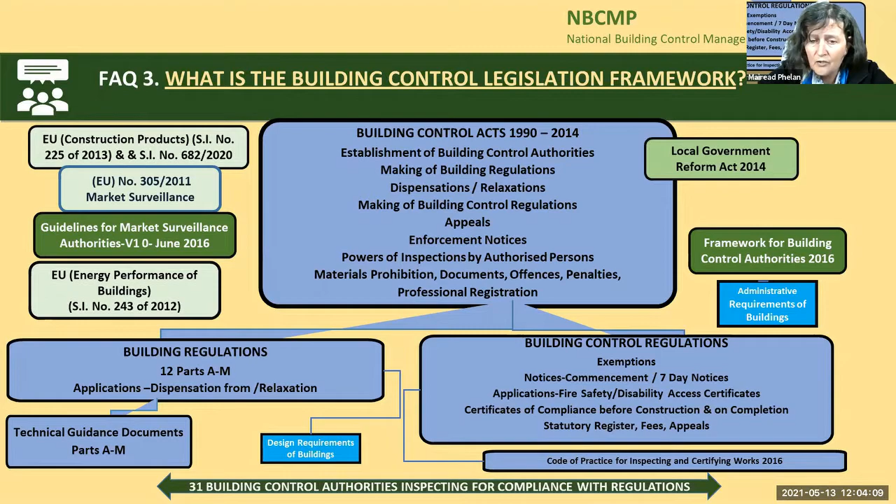We have a big army of building control inspectors on the ground in each local authority who are there to assist you in promoting compliance, promoting good building practice, and promoting health, safety and welfare of people in or about buildings, and we are there to assist them.

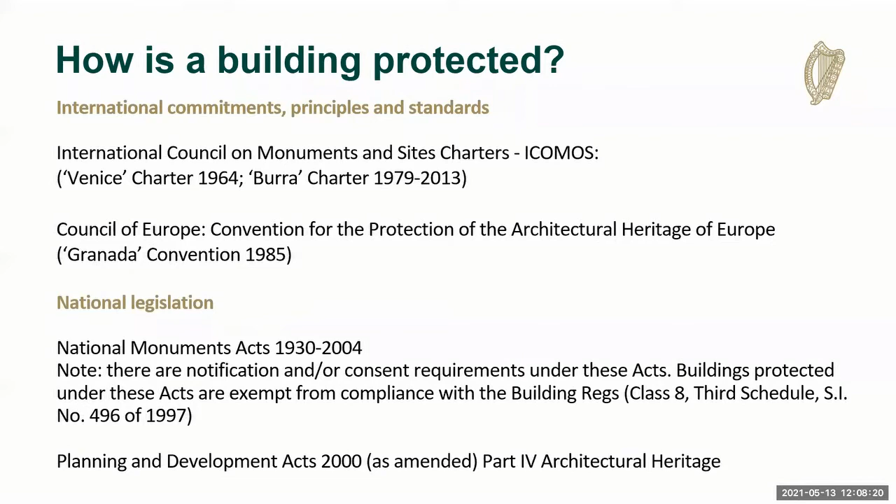Also of interest to yourselves, any buildings protected under the National Monuments Act are exempt from having to comply with building regulations. That's not to say they don't have to be safe, comfortable places to live in, but it does take them outside the loop of having to actually meet the individual requirements of the building regs.

So why are we doing all this? We are protecting our architectural heritage in the common good. They're a unique cultural resource and they are irreplaceable. People say they can build exactly the same building, but to the knowing eye, to the knowledgeable eye, these are just replicas.

Now we also need to start thinking about sustainability and climate action. We need to think about reducing both building waste and the use of building products. We need to reuse the buildings we have already and recycle them as necessary too. We also must think about cultural heritage and cultural tourism, telling people what Ireland's contribution to global heritage was. This is what these buildings represent for us all, and this is why we're trying to protect them.

I'm sure you're all familiar at this stage with the Architectural Heritage Protection Guidelines. They were a requirement under the Planning and Development Act 2000 for our minister to issue guidance to the planning authorities on how they were to protect their architectural heritage, both regarding what kind of buildings they should be trying to protect, and also how they would deal with planning or development applications for changing them.

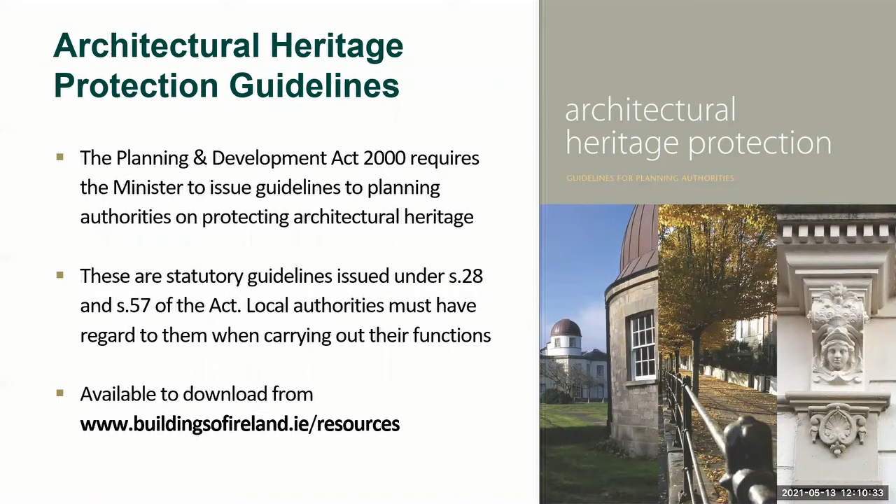Because conservation is about managing change. It's not about stopping change. It's about making sure that what is special about the buildings is kept through the process of change. These are statutory guidelines, issued under Section 28 and Section 57 of the Act, and so the local authorities must have regard to them when carrying out their functions. Unfortunately, they're no longer available in hard copy. I think we had hoped by this stage they'd have been in a second edition, but you can still download them from our buildingsofireland.ie website.

And I always think it's worth looking at what is the definition of a protected structure, because it is actually quite an all-encompassing definition. The protection can extend to the interior of the structure, the land and its curtilage, so the package of land associated with the building, any structures within that curtilage and their interiors, and then all features and fixtures which form part of the interior and exterior of any of those structures. And then even larger scale, it can be applied to any specified feature within the attendant grounds. So this would be set out in the development plan, in the record of protected structures. For example, with a country house, they might say it includes all gate lodges, domain features and the like. So the definition can be quite extensive.

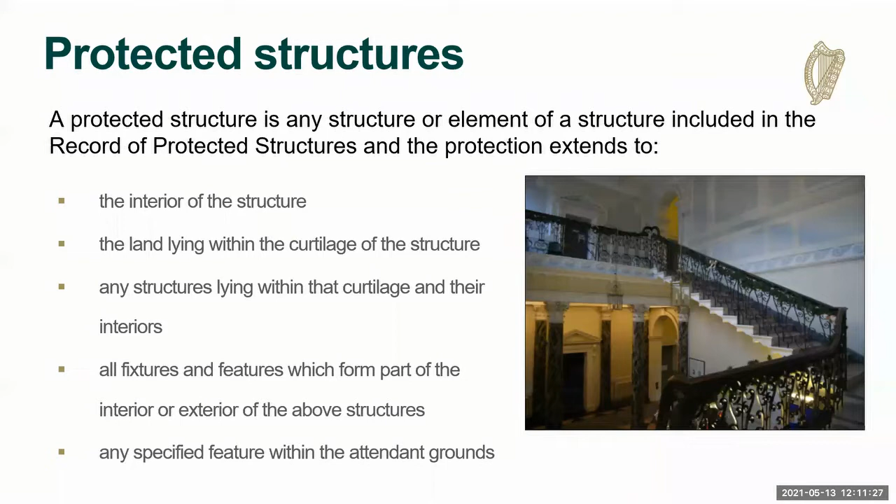Protected structures have to be of special interest according to the Planning and Development Act. So there are a number of categories set out, and I'll talk you through them to give you an idea of what makes a building special enough to be on the RPS.

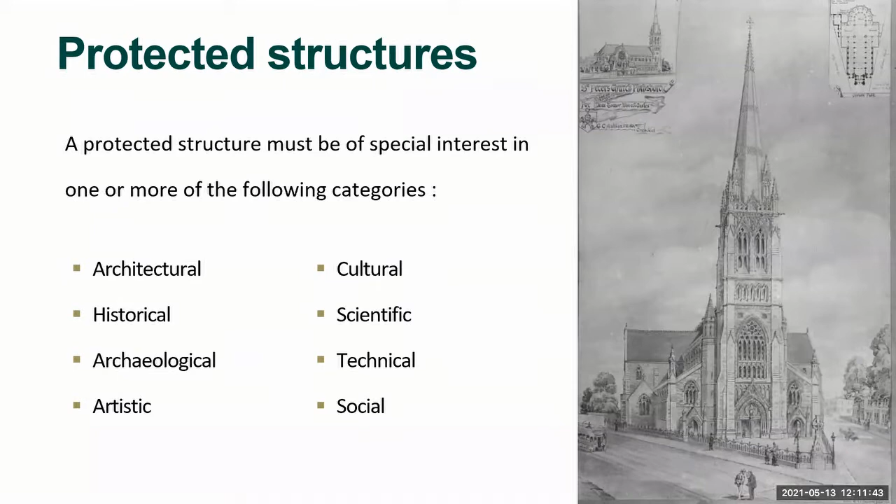It can be of architectural interest, which means it could be either a very good exemplar of a particular style or time of style or fashion of buildings at the time. It could be the work of a major architect or designer. I'm showing here Busáras because there's no limit on what date a protected structure has to be before it's protected. So modern movement buildings can and are protected structures.

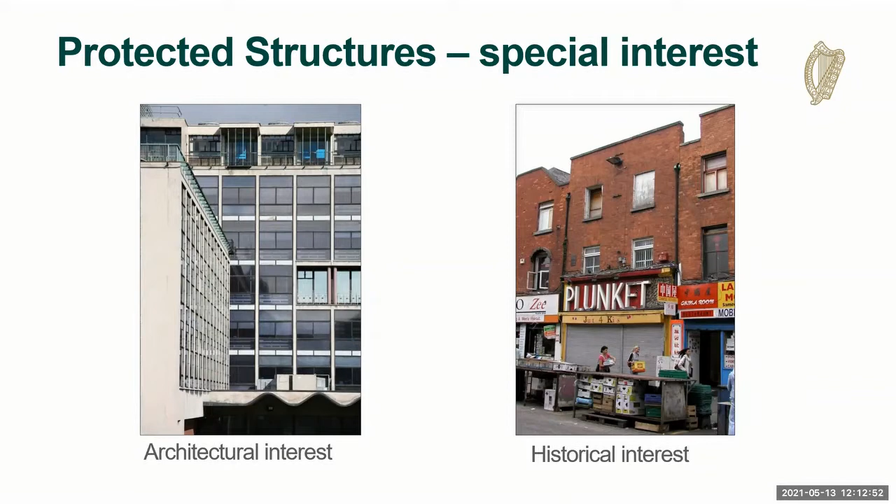A building could be of historical interest, so again it could epitomize a particular era or time. I'm showing here a protected structure on Moore Street in Dublin, which was associated with the Easter Rising. While it is an important 1760s building in its own right, so it's of architectural interest for that reason, it's particularly of historical interest because of its association with the Easter Rising and the fact that this was supposed to be where the last meeting was held of the rebels before they surrendered. So that has actually put it into a different category. It's actually now a national monument in state ownership as well because of those particular interests.

A structure could be of archaeological interest, telling what we can learn from the past from a particular building or structure. So many of these structures would also be recorded monuments. This is Thoor Ballylee in County Galway. It's of architectural interest, quite obviously. It's of archaeological interest. It's also of cultural interest because it was somewhere where W.B. Yeats lived with his family. It was also converted at a later stage by William Scott, who was a very prominent architect of the early 20th century. So you can see a structure kind of all kinds of overlaying and intermingled special interests.

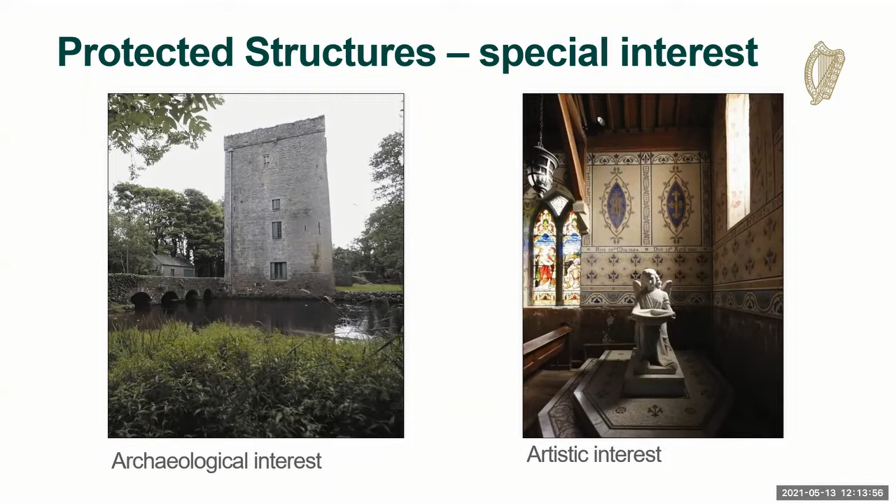Artistic interest then is generally more difficult to define, but in this case we're using an example of this church interior. As you can see, it's not just of architectural interest, but then there's also the extra interest of the mosaic work, the sculpture, the wall decorations, the stained glass, which all gives it that extra special interest.

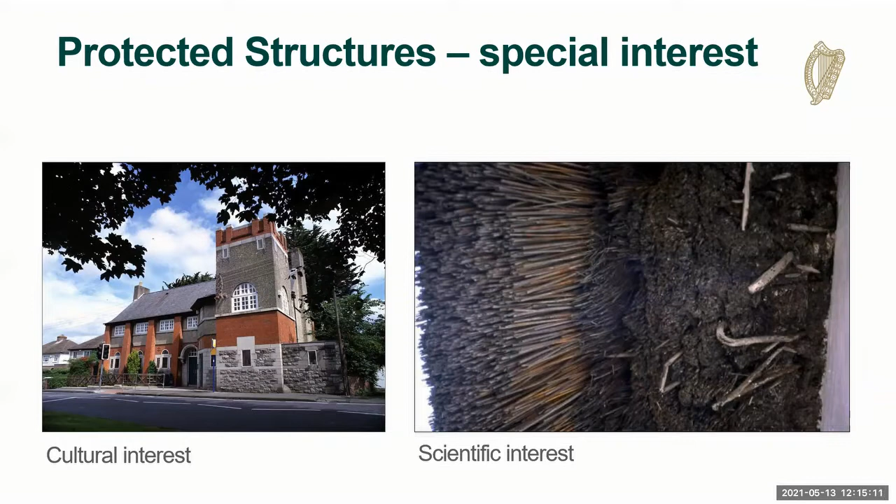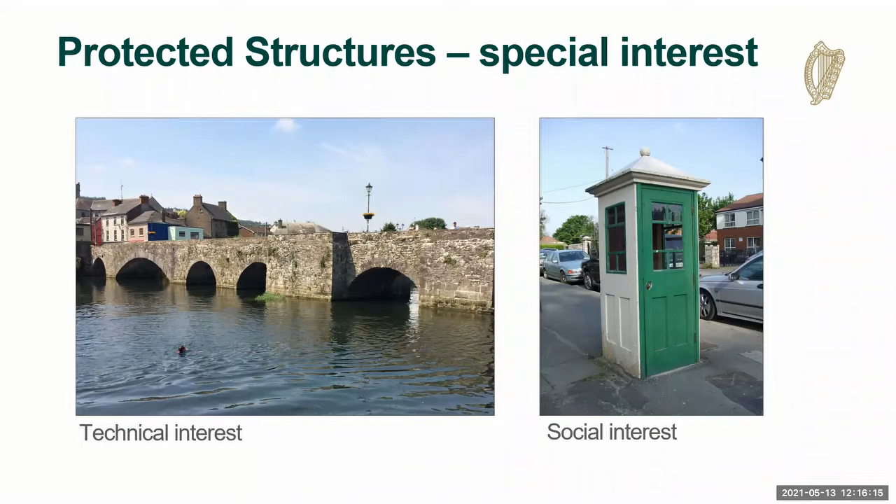So those are the categories of special interest.

A building could also be protected by being within an architectural conservation area under Section 81 of the Act. This is a way of protecting groups of structures that are distinctive or important. Maybe looking at protecting a group where the exteriors are of interest, but the interiors don't merit protection. An ACA can also be used to protect the setting of a protected structure.

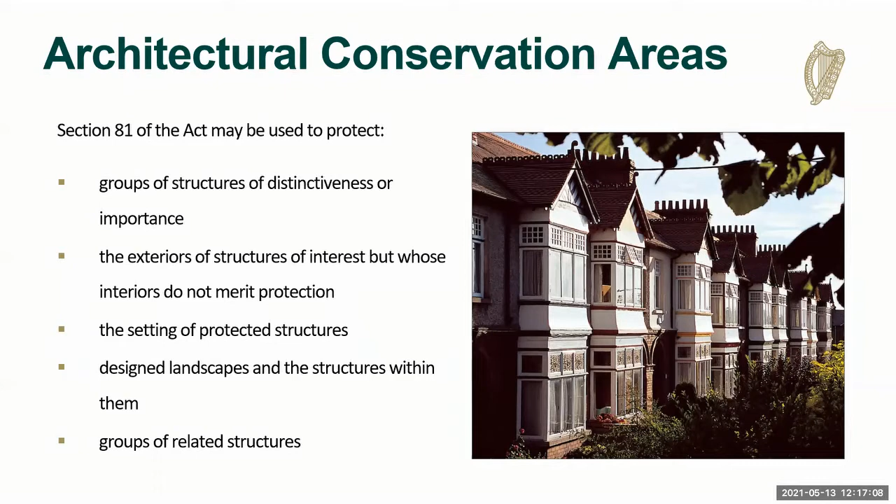It can be used to protect a designed landscape and the structures within them. So you might have an industrial heritage landscape, like a mill building, that would have a lot of other structures associated with it, like mill ponds, weirs, mill races, bridges and other structures. An ACA would be a good way of protecting them and the way they interconnect with each other. But really, an ACA can be any group of related structures.

A building can also be protected as a protected structure within an ACA. If not, if it's just protected because it's in an ACA, then works to the interior are exempt from planning permission. But there might be restrictions on the type of work an owner could carry out to the exterior of the building.

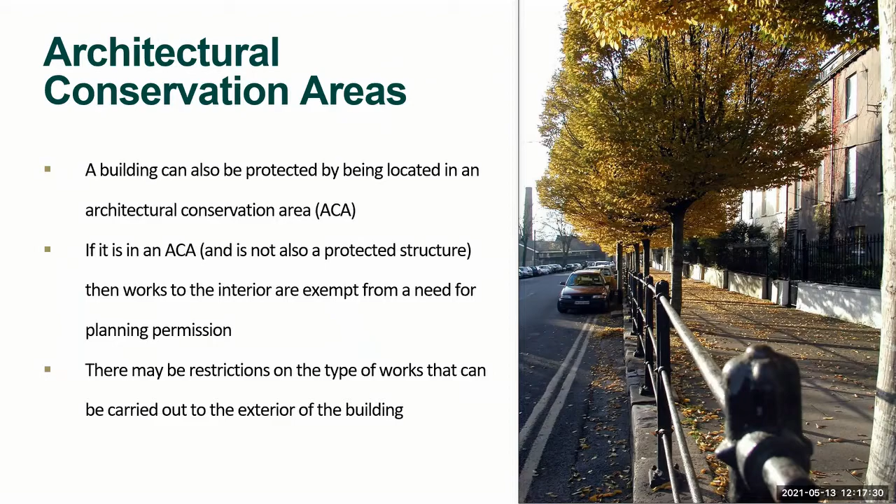So what does it all mean in practice? There are different requirements for planning applications. The test is that all works which would materially affect the character of a protected structure need planning permission. This includes works to the interior of the building, to the exterior of the building, and even where the works are to comply with building regulations or fire safety certificate work.

If it materially affects the character of the protected structure, it needs planning permission. This is why it's very important that any changes to comply with building regs or fire safety need to be included and thought about at a very early stage, so that if they have a material effect on the character of the building, it can all be included in the planning application.

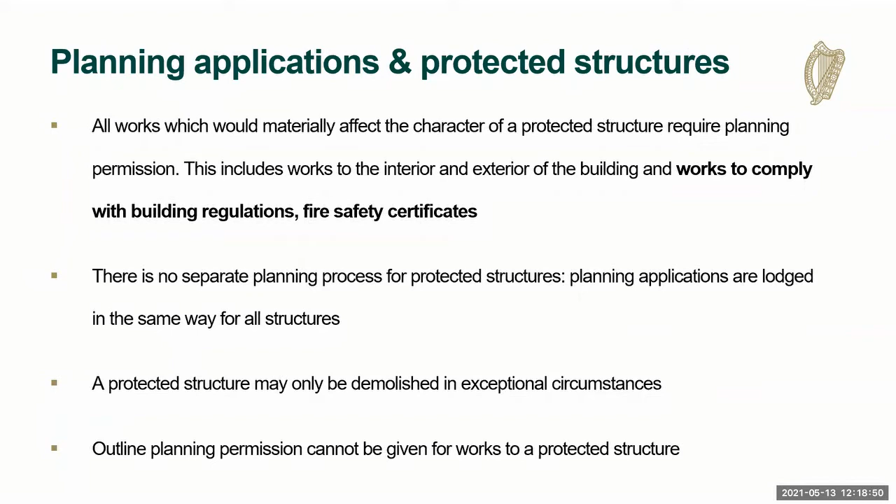There is no separate process for protected structures as there are in some other jurisdictions. All planning applications are lodged in the same way for all structures. A protected structure can only be demolished in exceptional circumstances. An owner cannot look for outline planning permission for a protected structure, again because it's in the detail as to whether the works materially affect the character of the building. So outline planning permission may not be valid if the details would affect the character of the building.

So an owner can look to the local authority for a Section 57 declaration. They don't necessarily have to have specific works in mind when they're looking for a declaration. It can just be to open a conversation with the local authority, like what is important about the building from the local authority's perspective, why have they added it to the RPS, so what works can the owner carry out or not.

Often it's recommended that if an owner is thinking of doing specific works, it might be more advisable for them to look for a Section 57 declaration to clarify what the need for planning permission is. The local authority has a statutory requirement to visit the building and issue the declaration within 12 weeks of the request. But this Section 57 declaration can't exempt any works from planning permission that would not otherwise require it. So it can really only clarify and row back on what it means for the protected structure status of the building.

So I'm just going to talk you through the conservation principles, so you get an understanding of what is special about the building and why we're trying to protect it. These conservation principles laid out in our guidelines are all underpinned by the international charters and conventions that are internationally accepted as good practice for protecting architectural heritage.

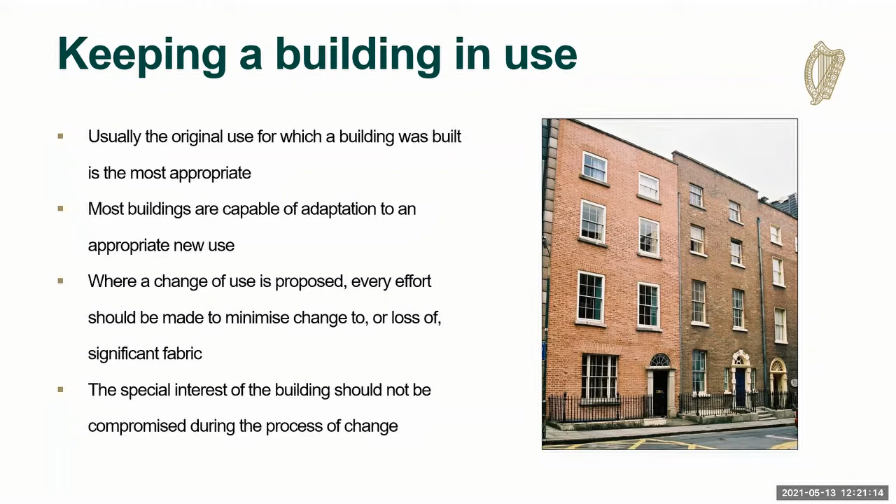But most buildings are capable of change. What is important, again, is to make sure that what is special about the building doesn't become compromised during this process of change.

We would always say that an owner, their architects and advisors need to understand the building before they start the works or before they even propose changes. They need to research the building's history, how it's changed over time, what kind of implications that has for different parts of the buildings, that they should look not at problems in isolation.

Like this damp problem here, where obviously somebody has decided to put in vents. There's obviously damp problems building up around, and the ground is softening. And really what's quite obvious here is that a rain barrel was taken away. So it's important not to go punching holes in walls, putting in vents without understanding what is causing the problem. That's just a very simple example of not understanding the building.

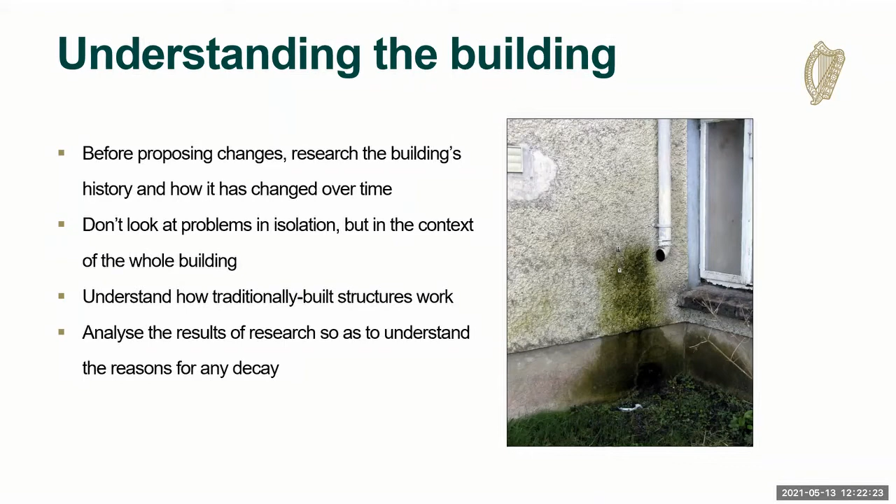Obviously, it can be more complex. To understand how traditionally built buildings work - and I'll talk a bit more about that later - these buildings were built with softer, more flexible materials, and that needs to be respected when changes are being made. You also need to analyse the results of all this research to find out what is the reason for the decay before you start proposing changes.

We would also advise owners to get the right advice, as it can be expensive and very damaging, and sometimes impossible to undo poorly carried out alterations and repairs. People should look for independent professionals, not somebody just trying to sell them an individual product or service, and make sure their advisors and contractors have the right skills for the job, that they know how to deal sympathetically with an older building, that they're not just used to dealing with modern construction, that they understand the principles of repair and conservation.

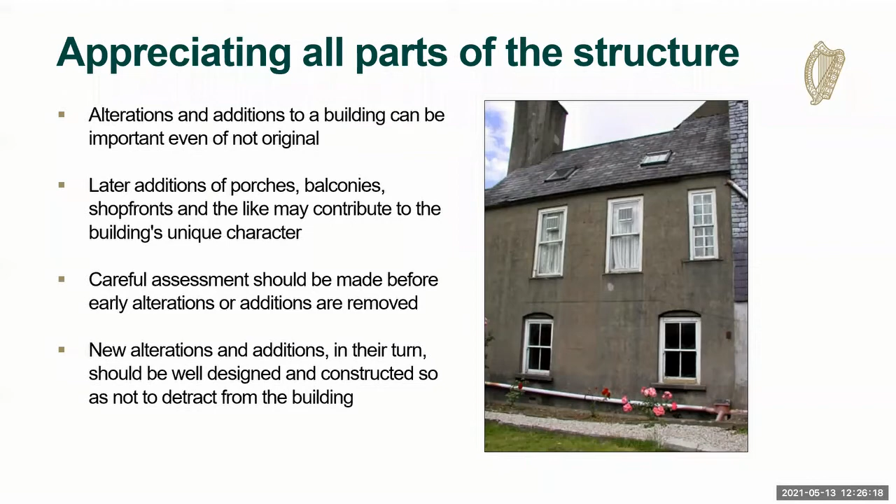Repairing rather than replacing. So conservation is about preserving the authentic fabric of the building, keeping not only the materials, but the kind of wealth of information about tooling and chiseling marks, mouth-blown and hand-cut glass and the like. And a good repair should delay the process of decay and prolong the life of the building or the element of the building without damaging its special interest.

And traditional buildings are usually capable of being repaired quite easily, as you can see here with the baluster where a new piece was spliced in. Often modern building materials, like concrete and the like, are less capable of gentle repair.

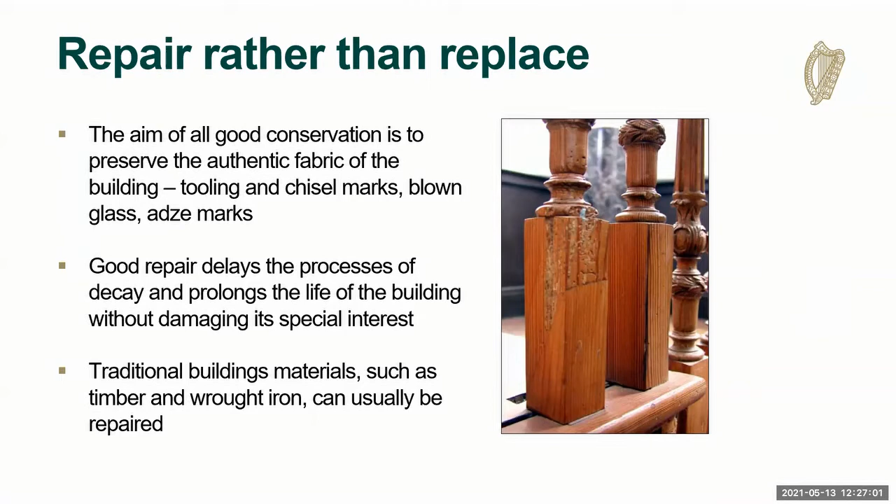Repairs can be honest, as can alterations. You know, they don't have to be artificially disguised or aged. Sometimes a good repair can leave an interesting record of the works done, but that doesn't mean they should detract from the visual integrity of the structure.

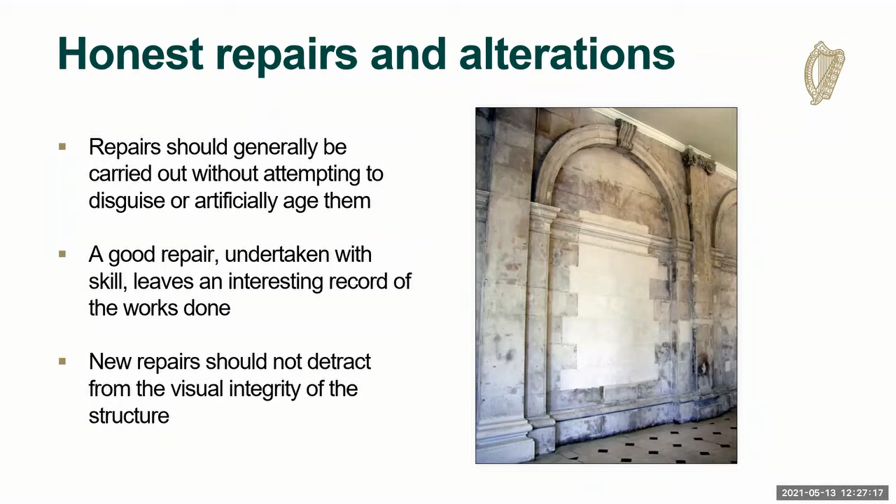You should use the right materials and methods, traditional materials and repair methods that have stood the test of time and have shown that they work. And really, modern materials and techniques should only be used where we have firm evidence that they won't cause damage.

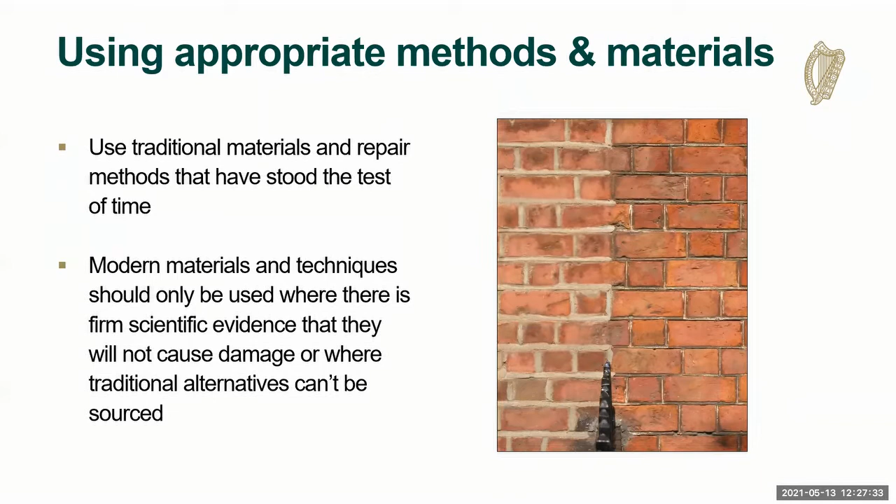Ensuring that changes can be reversed is also an important conservation principle. It isn't a justification for inappropriate interventions, but it does allow for future correction of unforeseen problems should they arise. So here you can see a later partition was taken out. They hadn't damaged the lovely Rococo centerpiece. They hadn't done any damage to the very elaborate cornice. So that was able to be reversed, taken out. It's not always possible, but it should be a principle to work on.

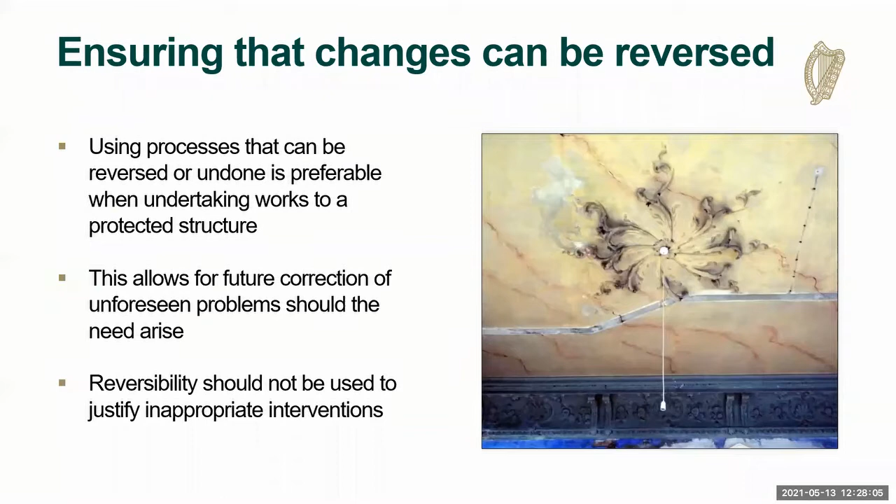And we would always advise planning authorities as well to avoid incremental change. It can be hard for them to refuse planning permission for small alterations, but you can see with the change of roof slates here to asbestos cement tiles, painting individual chimney stacks. Actually, the windows are still all the originals here, but you can just see how the architectural integrity of a group of buildings like this can fall apart with small incremental changes.

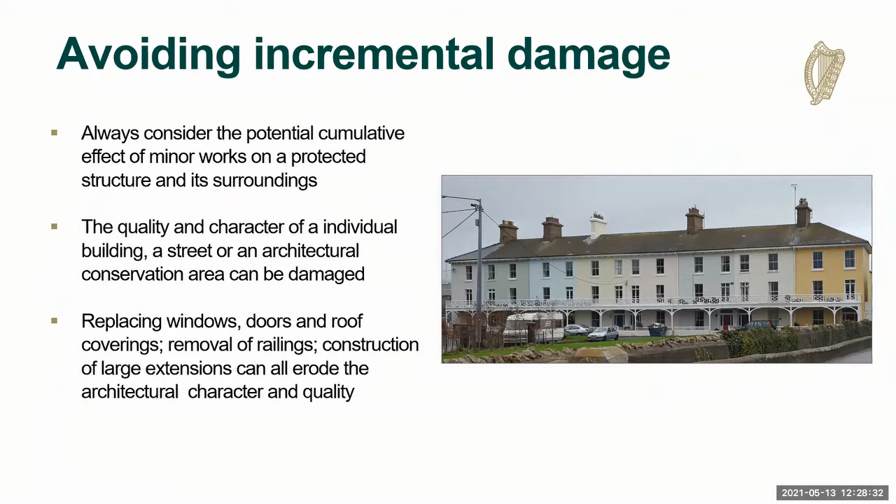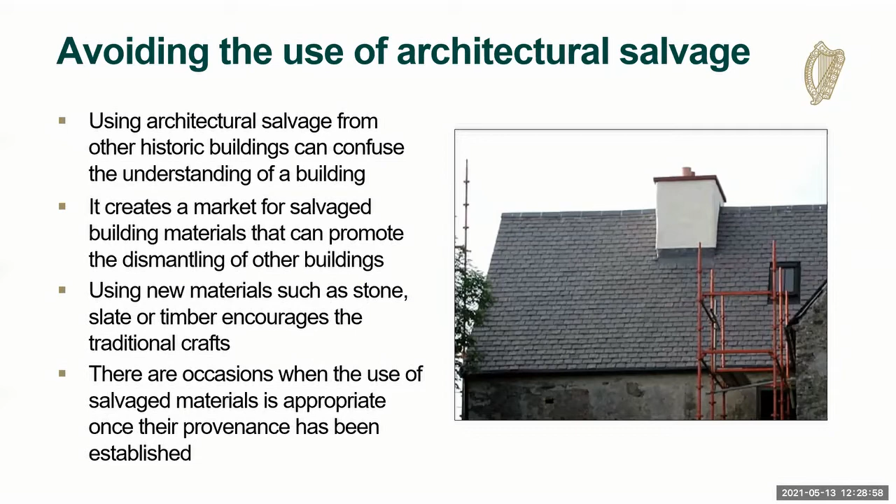We also advise the avoidance of the use of architectural salvage because it can confuse the understanding of the building. It can also create a market for theft and dismantling of other historic buildings. And using new traditional materials like stone or slate or timber does encourage traditional skills and craftsmanship. But obviously, there are occasions when it will be appropriate to use salvage materials, providing their provenance has been established.

So just to point you to some other guidance documents that we have published in the department. These were originally designed specifically for the owners of historic buildings, but they also set out what the department feels can be considered good practice and direct advisors, contractors, as to what they should be doing when they're dealing with older buildings and what is considered good practice. It's a series of 12 booklets. The latest was published just at the end of last year on disaster risk management.

Just talk briefly about access and a bit more detail about the energy efficiency because they're probably the most appropriate to yourselves. Access we published, it was written primarily by Gráinne Shaffrey of Shaffrey Associates Architects and Fionnuala Rogerson Architects. So this was a joint publication we did with the National Disability Authority, and it was giving advice on improving the accessibility of historic buildings and places. So I'd advise you have a look at it if you're involved in that.

I'll talk a little bit more about energy efficiency because this is a topic that is going to be very much to the fore in the next number of years. We published this guidance back in 2010. The principal authors were Paul Arnold Architect and the Energy Research Group in UCD. And again, it set out the principles of upgrading energy efficiency for older buildings. And what we call them traditionally built buildings because it was more about the way they were built with solid masonry walls rather than necessarily just their architectural heritage interest.

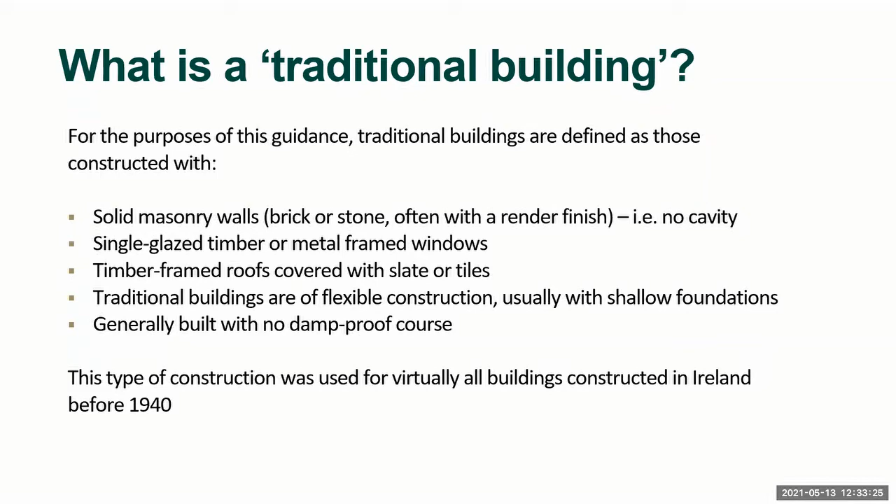So just what is a traditional building? So for the purposes of this guidance, we've defined them as buildings built with solid masonry walls, so no cavities, often brick or stone, sometimes with a render finish. They usually were originally built with single glazed timber or metal framed windows, timber framed roofs with slate or tile covering. As I say, they were generally of flexible, soft construction using lime mortars, usually with shallow foundations. So they were built to flex and move with and respond to environmental conditions. They were generally built with no damp-proof courses. And it was the type of construction that was used for almost all buildings constructed in Ireland before 1940. So it's a large percentage of the building stock.

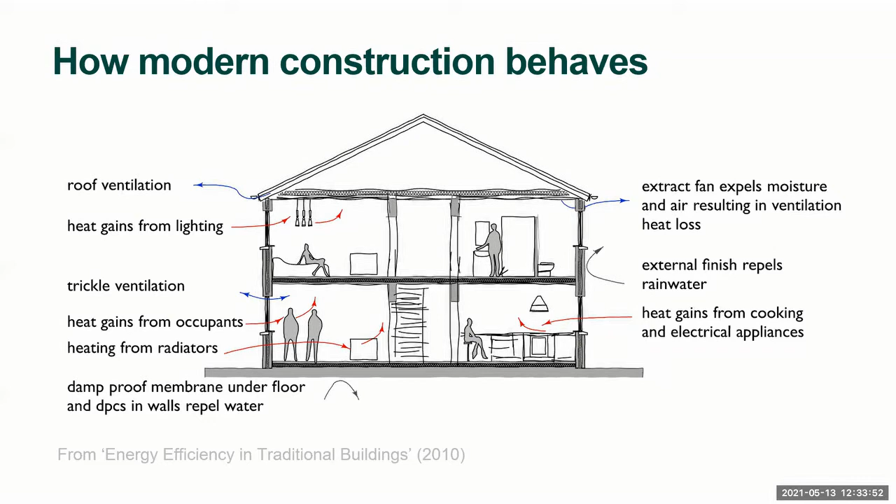So we included in our 2010 guidance just how modern construction behaves. So it's all about stopping water getting into the fabric of the building, and then having to provide ventilation to make sure that the interior air quality stays good for the occupants. It's all about having damp-proof courses, impermeable surfaces and the like. Whereas traditional buildings relied on the thickness of the exterior walls, these solid masonry walls. They relied on the thickness to make sure that rainwater and damp didn't penetrate to the interior of the building before external environmental conditions would change and the wind and sun would dry out the walls.

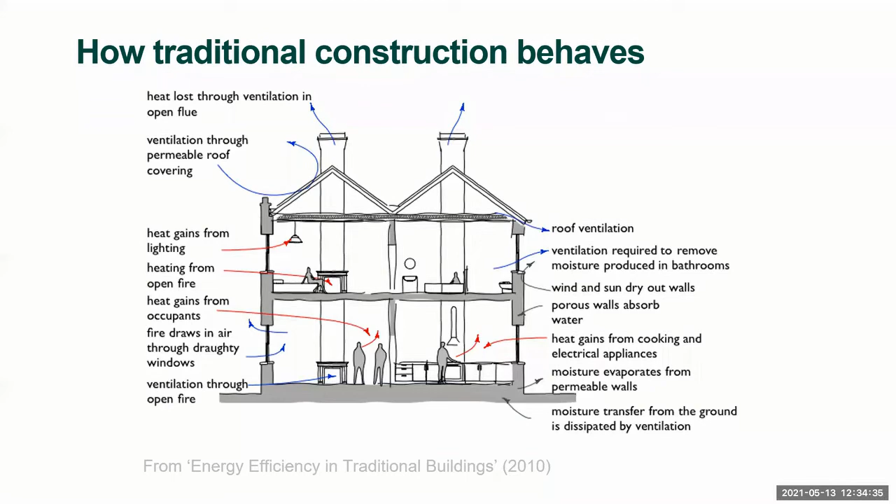So natural ventilation was provided naturally, either through chimney stacks or through the meeting rails of sash windows, or through ventilation in between the roof slates or ventilation at eaves. So they're very differently constructed and very different ways of dealing with environmental conditions. So these were building methods that evolved over centuries, making use of the best available materials and craft skills, and with an understanding of local weather conditions.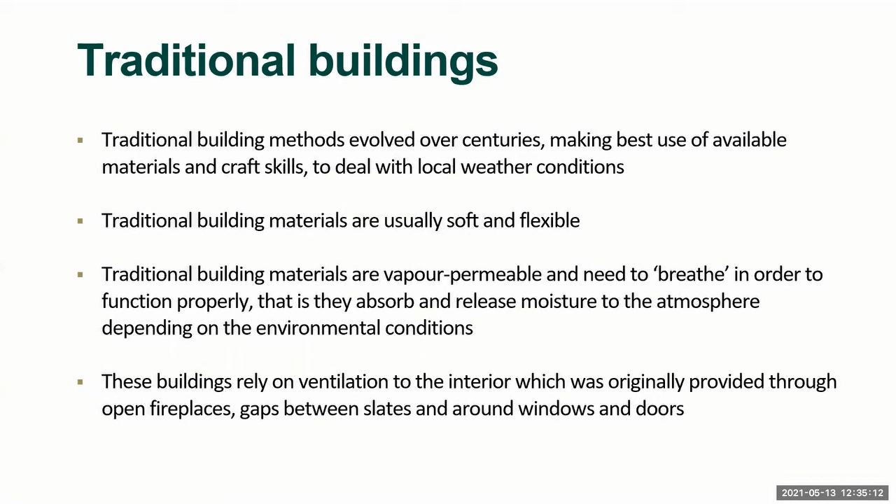So traditional buildings are vapor permeable, so they need to breathe, so allow atmospheric water, both vapor and liquid water. They need to be able to breathe in order to function properly, so absorb and release moisture to the atmosphere depending on what the weather is like outside, and they did rely on ventilation to the interior.

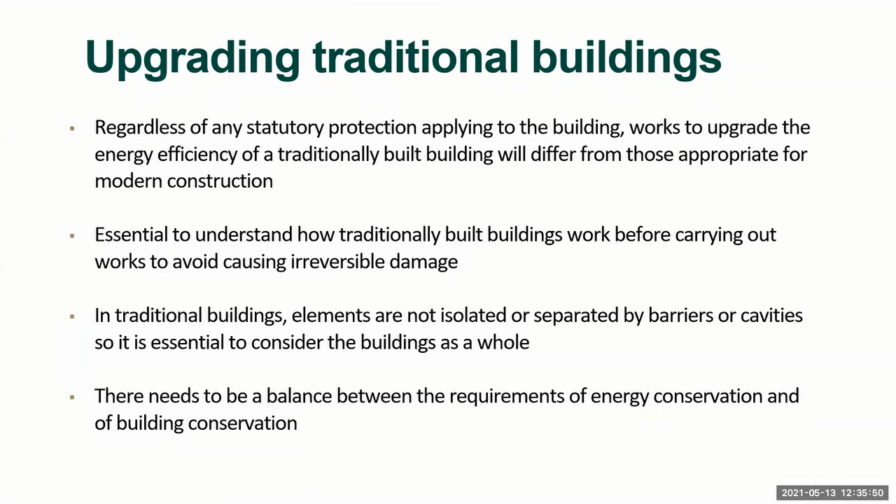So regardless of what kind of statutory protection applies to these buildings, the works to upgrade them need to take account of the different type of construction. And it's very important to understand how these buildings work before people carry out works or propose works to them to upgrade their energy efficiency, because sealing them up will not work and will cause problems to the interior of the building, to the fabric of the building, and also to the people, the inhabitants. So there needs to be a balance between energy conservation requirements and building conservation requirements.

So good ventilation is critical to the well-being of these buildings. We don't want to start trapping moisture within the building materials, like interstitial condensation within the wall or condensation on the actual surfaces as well. Also very concerned that moisture levels don't build up in timber elements, because at a certain moisture content level, timber becomes very vulnerable to insect attack, to mold, dry rot and the like.

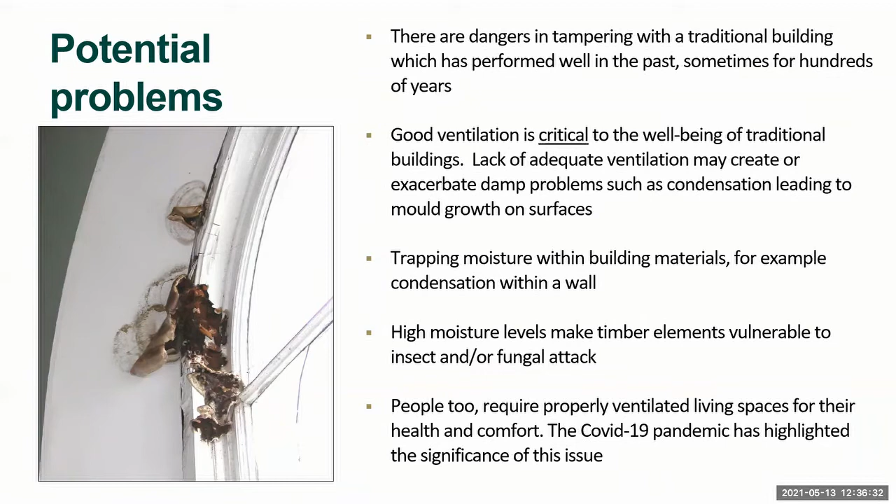And our people too need to live in properly ventilated living spaces for health and comfort. And I think we've all become much more aware of this since the pandemic. We realize how significant it is that good air quality on the insides of our buildings is very important.

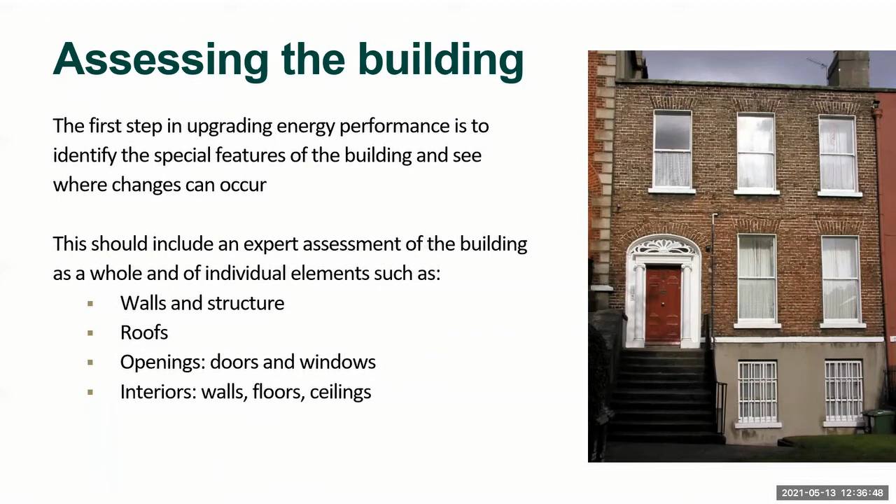So our recommendations are that prior to any upgrading, there needs to be an assessment of the building, looking at the whole building before honing in on the individual elements to see how they can be upgraded. Generally, the best way is to start with simple things like draft proofing windows and doors, insulating the roof, replacing outdated services, because most of these buildings were not built with these electrical, gas, water services in the first place. So they have been retrofitted so they can be changed again.

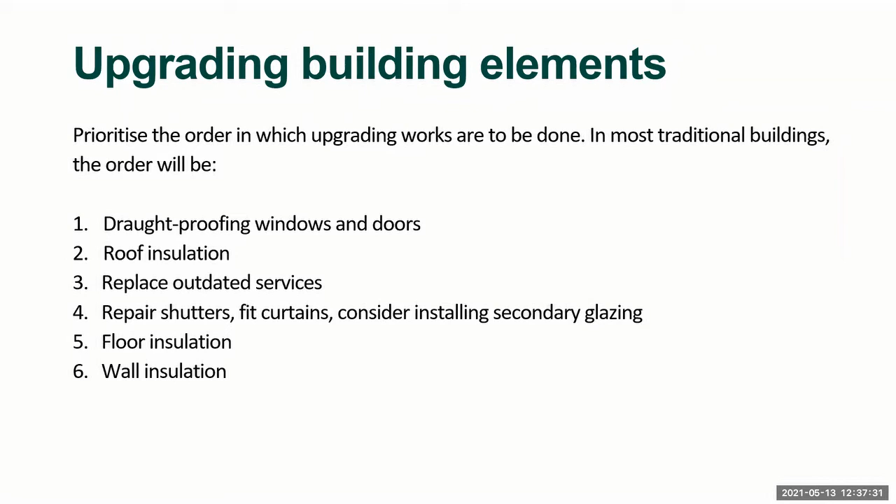Then you get into more difficult things like repairing shutters, installing secondary glazing, floor insulation, and then wall insulation can be particularly problematic with these buildings. So it needs to be properly considered and a stepped approach taken, making sure that you don't get locked into certain decisions by decisions that are made early on in the process of upgrading if there's going to be a stepped approach taken.

There may be problems with energy upgrading works and need for planning permission, because again, as I said, if it materially affects the character of the building, or if it affects the character of an architectural conservation area, planning permission will be required. And this may be problematic, particularly with external wall insulation, internal wall insulation in a protected structure where it would interfere with important decorative schemes or require removing cornices, paneling and the like. And then removing historic windows and glazing. So we would always recommend exploring other options like installing secondary glazing first.

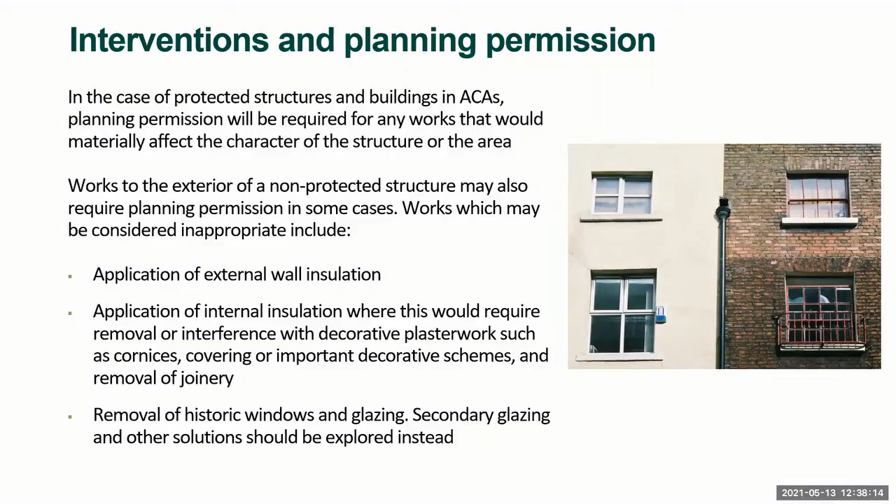And then just to finish off, looking at adaptation and reuse. You will all know better than me that the purpose of the building regulations is to provide for the health, safety and welfare of people in and around buildings. They don't necessarily apply to these kind of buildings except where there's a material change of use.

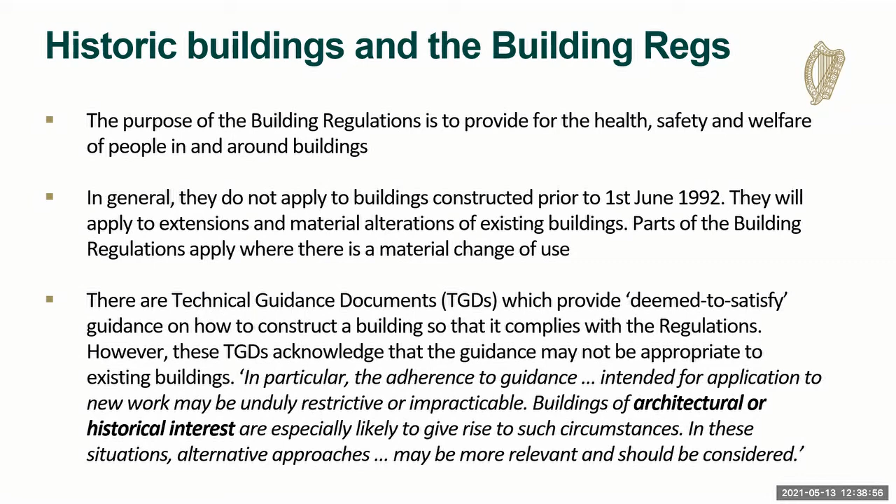But we would always draw people's attention to that paragraph in the technical guidance documents, which acknowledges that the guidance in the TGDs may not be appropriate for existing buildings, particularly where they're of architectural and historical interest. And the TGDs themselves do recommend alternative approaches may be more relevant and should be considered. And as you know, probably the most important ones are the ones where problems are most likely to arise, with fire safety and access and use. And while protected structures and proposed protected structures are exempt from Part L, that doesn't mean to say that people don't want to upgrade these buildings as well and make them more energy efficient.

Part L, as you know, was a number of years ago amended to apply to existing buildings. So that has implications for historic buildings too.

I was on the working group that put this together. Not necessarily all our advice was taken on board, because it was produced by the Department of Housing. But they did include a number of case studies of historic buildings, many of which were proposed by myself and my colleague Nikki Matthews, put forward as case studies, which were accepted.

I'm just going to show you some of these. Nikki would have been aware of these from her work in Dublin City Council. So we knew these were buildings that had been repaired to the best and upgraded to the best conservation standards, as well as bringing important buildings back into use.

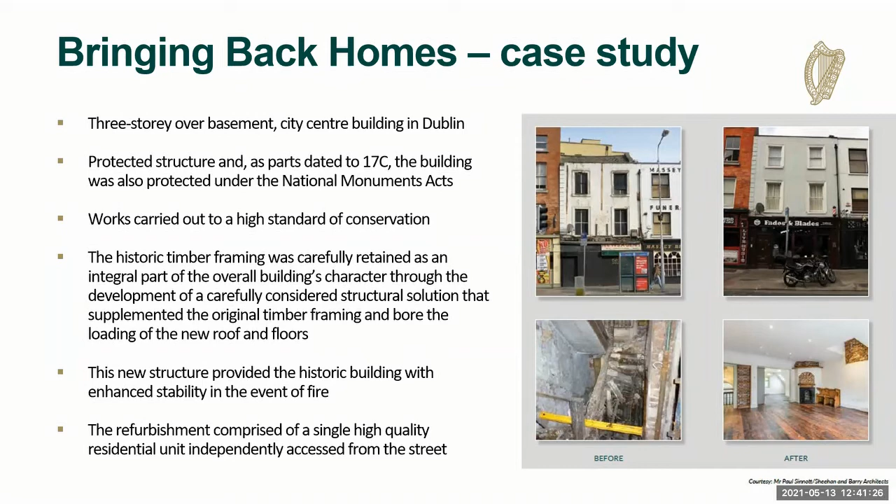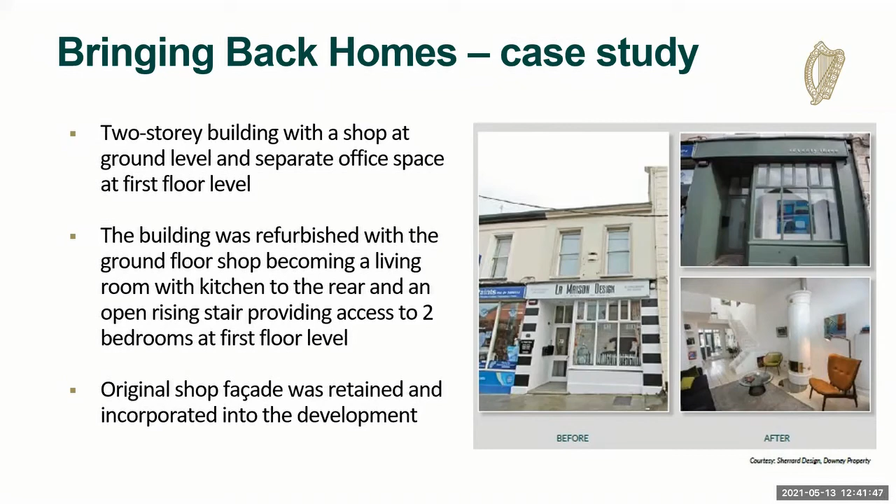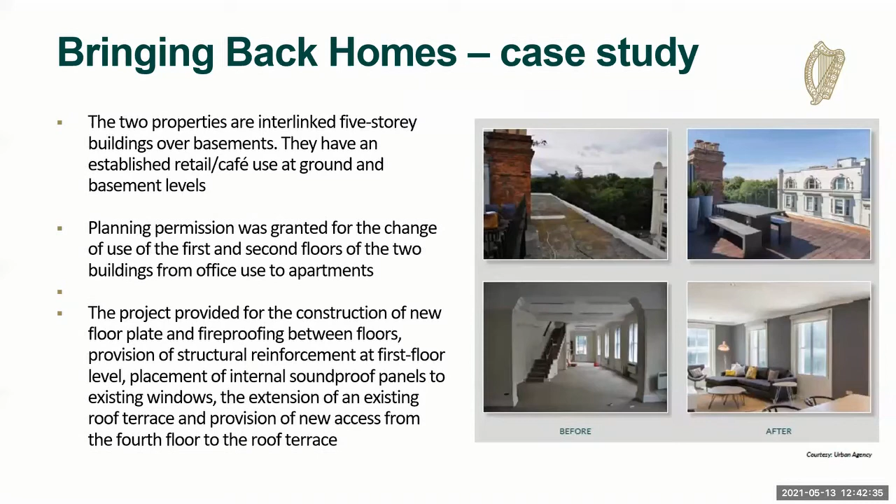It was all carried out in compliance with building regulations and provided really high quality living accommodation while keeping the commercial units at the ground floor level. Really high quality, beautiful, with a roof garden overlooking Stephen's Green. These buildings can provide very high standard living accommodation if they're properly treated.

So just to conclude, to quote Carl Elefante, an American architect and former president of the American Institute of Architects, who coined the phrase that the greenest building is the one that's already built. I started by setting the international context as regards conservation, but now we need to look at the international context as regards our planet, sustainability and climate action, and what historic buildings can contribute to that debate.

Our existing buildings contain a lot of embodied energy which will be lost if a building is demolished. There have been numerous studies showing that the greenhouse gas emissions involved in demolishing a building and replacing it with one of similar size can take decades to recover. And we don't have decades anymore as regards climate action.

We need to make use of not only our full buildings, but we need to start looking at the underused and unused floor space in our towns and cities. We keep hearing the argument about densification. We have the floor space there, we just need to bring it back into use. I've shown you with those three case studies how those upper floors can be brought back into use. It will require a multidisciplinary approach, often within the design team, but also within the local authority.

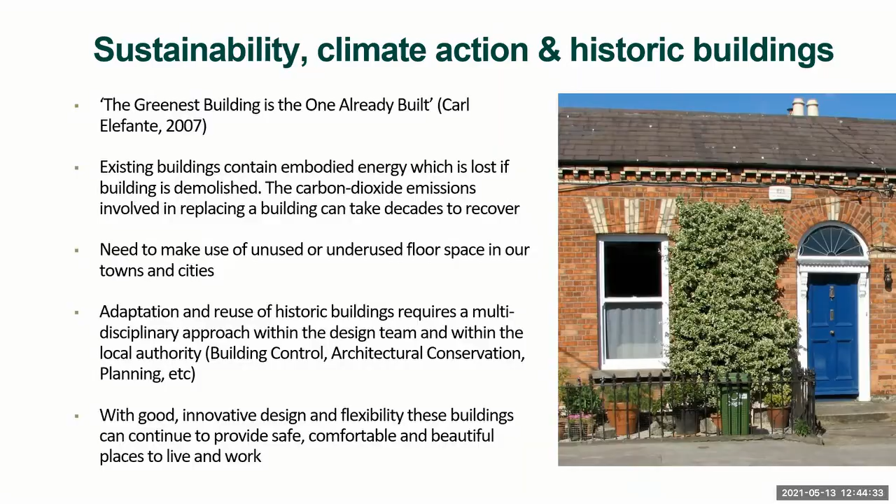It needs building control, architectural conservation, planning and the like, all to get together at an early stage to help with the design decisions needed to make sure everything is properly considered, enabling these buildings to be brought back into use. With good and innovative design and flexibility on both sides, these buildings can contribute to our modern lives. They can provide safe, comfortable, and above all beautiful places in which we can live and work. Thank you very much for your attention. I will stop sharing now, Mairead.

Thank you very much, Jacqui, for a very concise and excellent presentation and a lot of food for thought there. I think the takeaway for everybody is that the greenest building is the one that's already built. We do have to think of future generations - we didn't inherit the earth from our parents, we borrowed it from our children. We have a wealth of built heritage which contributes to the economic and social life of this country, and building control officers, conservation officers, fire officers, and planning officers all contribute to this. So we really should be talking to one another and ensuring we maintain this fabric. It's a good climate change initiative, and we have lovely innovative building practices we can and should be using. Jacqui outlined very good information there, and I'd suggest everybody go look for it on your website - the 12 little booklets are wonderful, and the energy efficiency for older buildings is another wonderful publication. We'll all have to work together doing that retrofitting for those 500,000 buildings. So we need to start talking to one another, and our climate action is very important.